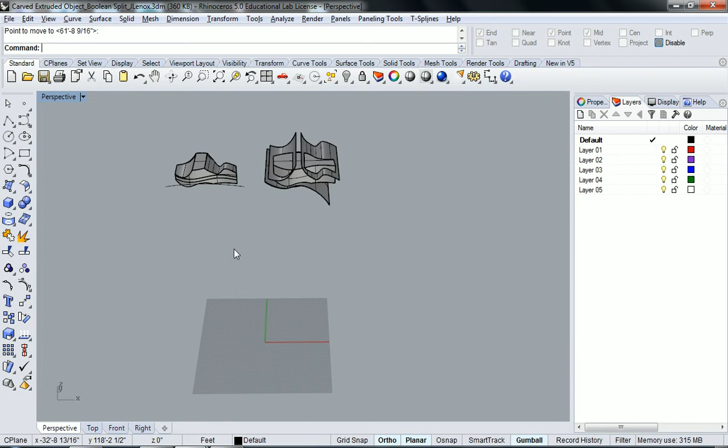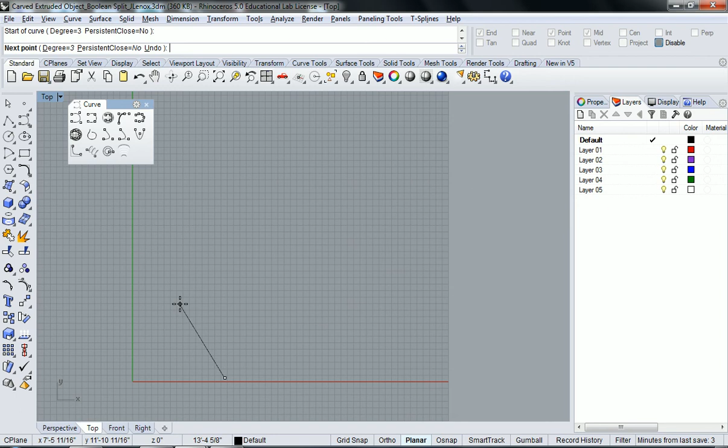So we're going to work on another shape similar to this one, using a similar process to achieve similar results. These are all just different methods for producing a carved shape. I'm going to use interpolated curves again, but instead I think I'll just use control point curves so I can get a nice smooth line. I'm going to turn my ortho off, my gumball off, and keep my object snaps disabled. I'm going to start to create an arced shape here.

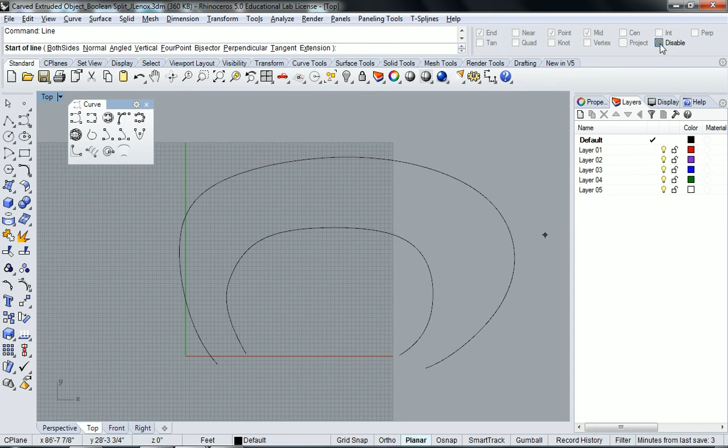And then I'm in top view, and I'm just going to go ahead and do another one here. I'm going to go through the same process again. I'll turn my object snaps on so I can have the endpoint selected, and go ahead and close this shape off. I'm going to join it together.

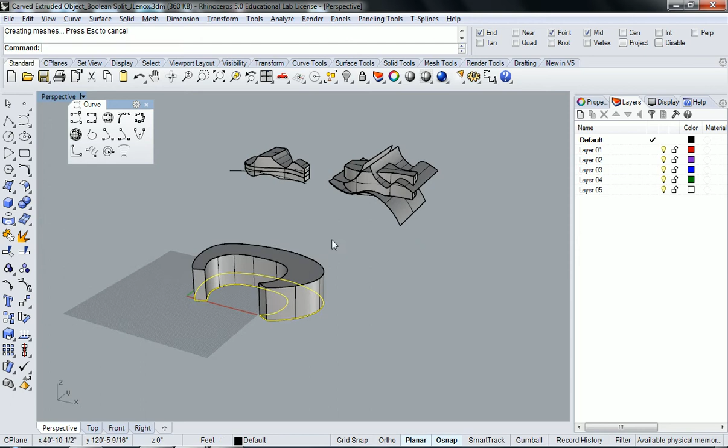Then I'm going to go into perspective, and I'm just going to extrude this curve. Let's do it a similar distance as we did before, I think I said 20 feet, and there it's created that for us.

I'm going to zoom to the selected object so that way I'm rotating just around it. So what we need to do now is figure out a new way to carve this, and the way we're actually going to do it is through a series of lines that we create that we can then loft together. What I'm actually looking to achieve here is more of a spiraling shape, a spiraling carving motion. Let's try and achieve that.

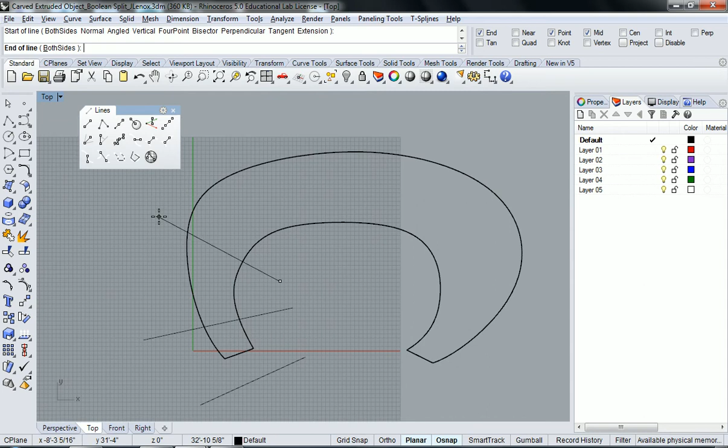The first thing I need to do is go into top view. I'm going to open up the lines area so you can see all the lines here, and I'm just going to use a regular old line. I'm going to start my first line sort of outside of the object, then hit spacebar to repeat the command, and do another one like right there, and another one right there, and one last one here. So I've got 4 lines, and they kind of sort of follow perpendicular to the curve I'm doing, just approximated.

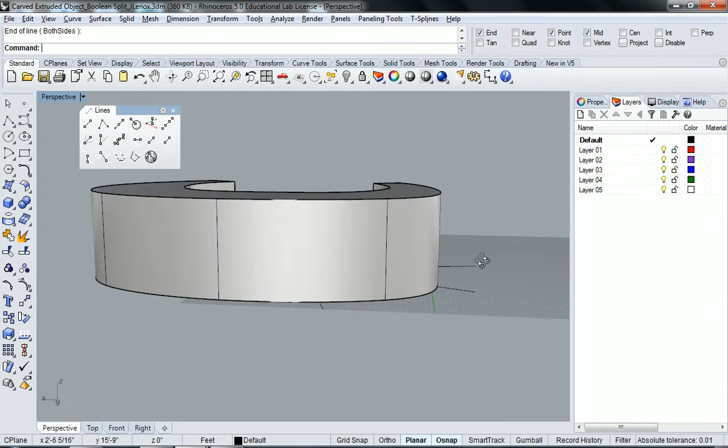Now that I have those drawn, I'm going to move these up incrementally so that way I can start to create a spiral. I need to move each one of these curves up a certain dimension, and since we made it 20 feet tall, since I have 1, 2, 3 here, I'm going to go 5, 10, 15.

The first one's going to be 0, and it's actually going to be this line right here. So I'm going to leave this one at 0, and move these 3 up. I'm going to turn on my gumball because it's an easy way to move, I don't have to type any commands, and I'm just going to click the blue arrow and type 5 for 5 feet, and you'll notice they all move. Then in order to deselect one line, I'm going to hold down Control and click the line I don't want anymore, and it'll deselect it.

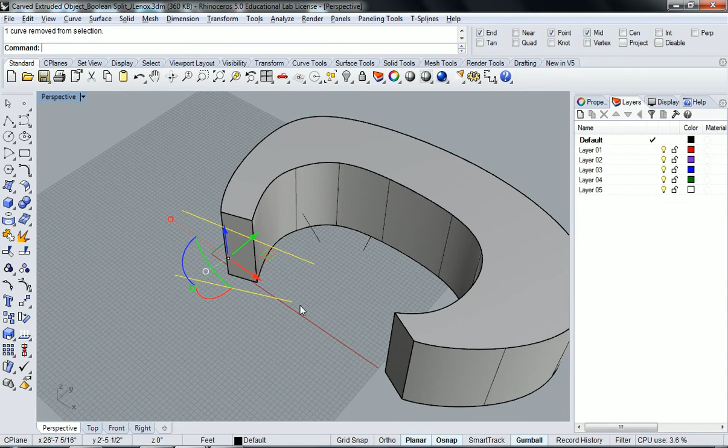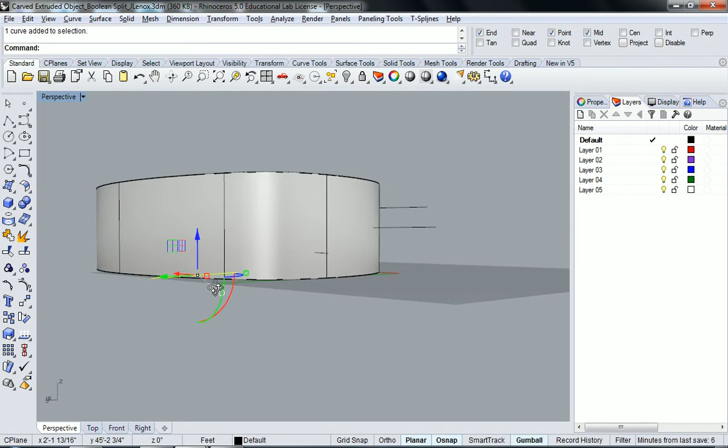Then I'm going to do the same process and incrementally move all these up 5 again. Then I'll deselect this last one, and move this last line up 5 again. So now you can see each one of those have moved up 5, with the first one being at the 0 plane.

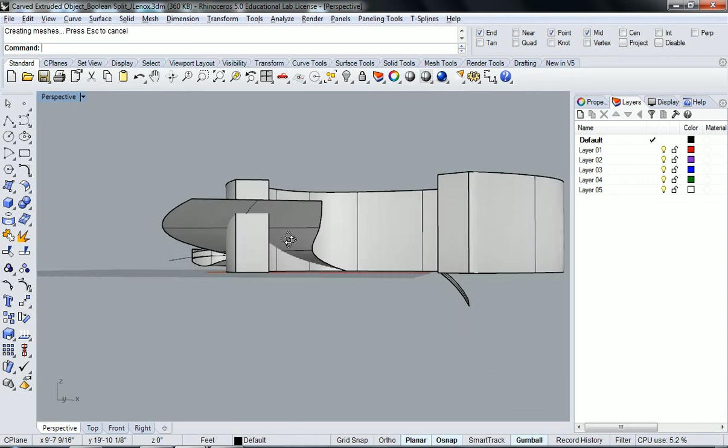So now what I can do is loft these together. I'm going to select all of them and hit loft. And I'm going to say OK because it looks good to me. So now I have that one taken care of.

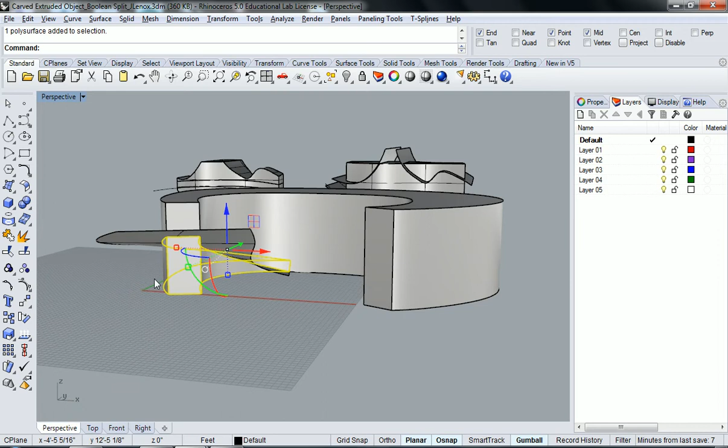So let's go ahead and split this out, right? Let's use the same command we did before, Boolean split. I'm going to select the object I want split, hit enter, then select the cutting object, and hit enter. Then if I hide this portion here and that surface, you can see now I've created a spiral.

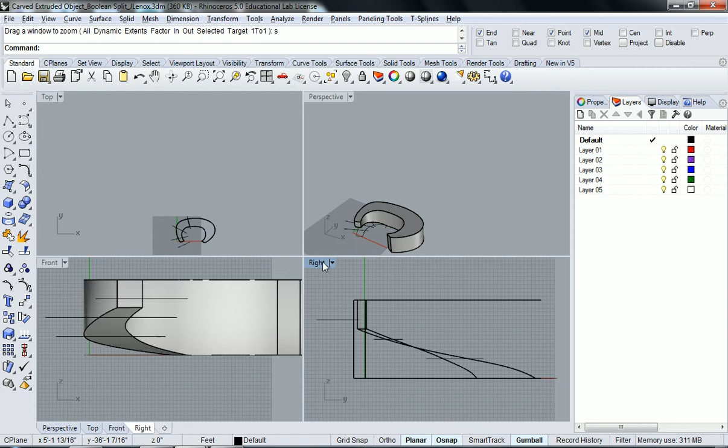If you go into your other views and hide all the information in the background so you just have that object, you can start to see the spiral there. I'm going to turn all my views into shaded so you can see it in all views.

So you can see in front view that using that series of lofted straight lines and moving them up incrementally will give me sort of a lifting motion that takes this object up off the ground. And it's also done in a spiral, so it's looking pretty interesting there.

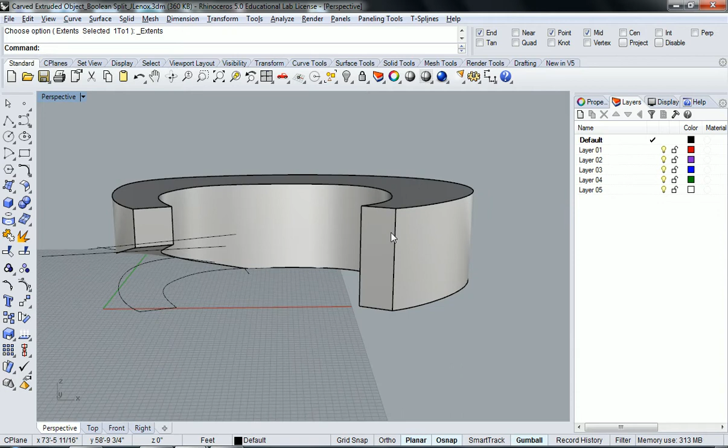I can accept that. So let's go ahead and do another one on this side. But this time, let's cut it going the other direction, right? So instead of from down to up, let's start from the top and work our way down. So what we need to do is the same exact process.

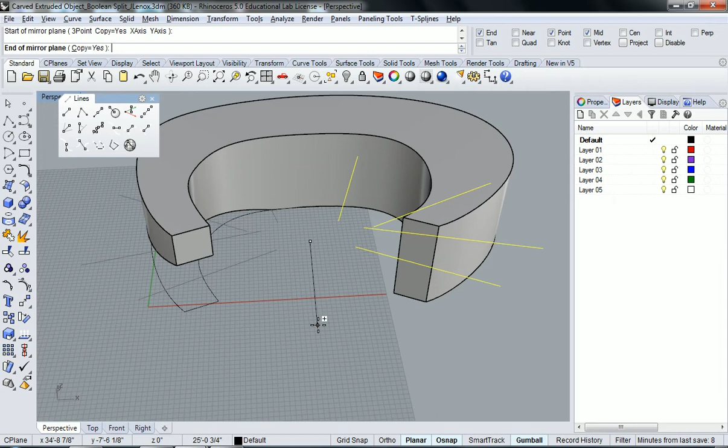I'm going to go to the lines here in the toolbar. I'm just going to select a line and mirror the selection, these lines here. I mean, you could, but the only problem with mirroring that is you don't have an axis to necessarily mirror off of, so you'd sort of just be doing it at random. And since I don't want the exact same result again,

I'm just going to go ahead and redraw new lines. You could do what I just did right now and mirror it like that, and then you could mirror it again.

Let's not worry about that, let's go ahead and just draw fresh lines. We'll have more control that way. So I'm going to draw a line out here.

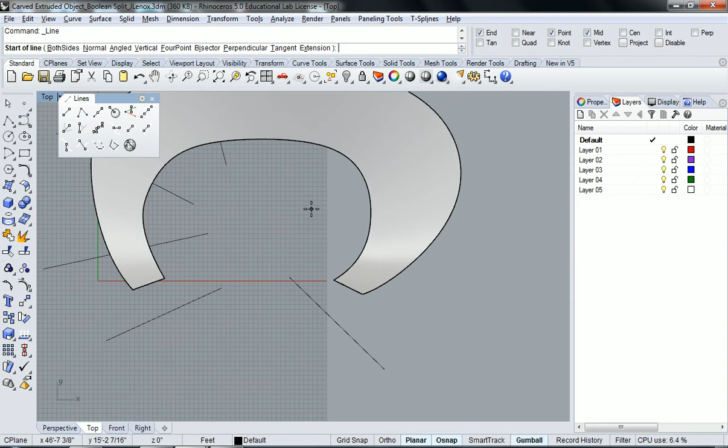I'm going to do the same process again. Draw another line there, another line there, and another line there. So now I've created 4 curves again.

Now that I have those created, I'm going to X out of my line toolbar. Let's say I was using lines and curves a lot, both of them, and I don't want to keep clicking to open them. What you can do is combine them together.

If you go ahead and select that, you can drag it in there, and now I'm creating my own customized toolbar. So maybe if I'm just using lines and curves, now I have this and it's really easy for me there.

And if you really use this a lot, you could dock it anywhere. So depending on if you're using something a lot, this will help speed up your process because they'll be readily available and right here.

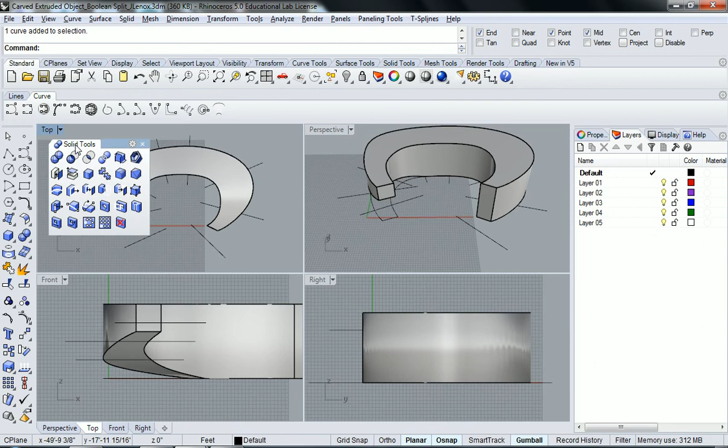So for instance, if we were using the Boolean stuff a lot too, I might want to bring that up there too and make that part of this as well. So now I'm using the solids, curves, and lines, and it's all right there for me, and it's just less time trying to remember where things are because you're creating your own custom toolbar.

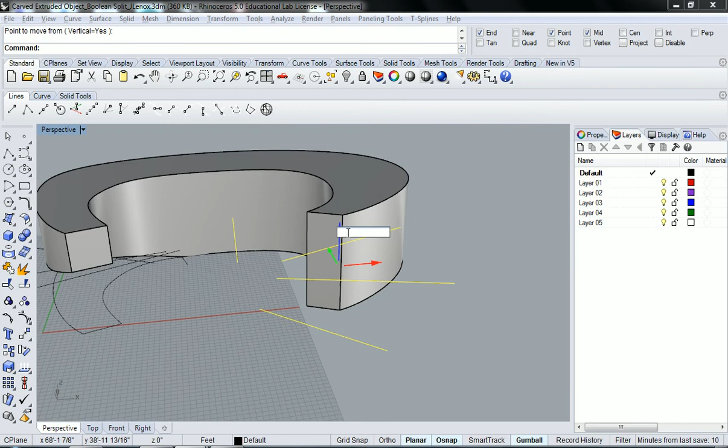So I'm going to go ahead and select all these lines that I just drew, and since our object is 20 tall, I'm going to go ahead and move them all up 20 so they're all at the same level. Then I'm going to deselect the one that's not on the plane.

Or you know what, that's the wrong one there. So I'm going to move them all up 20, and I'm going to deselect this one.

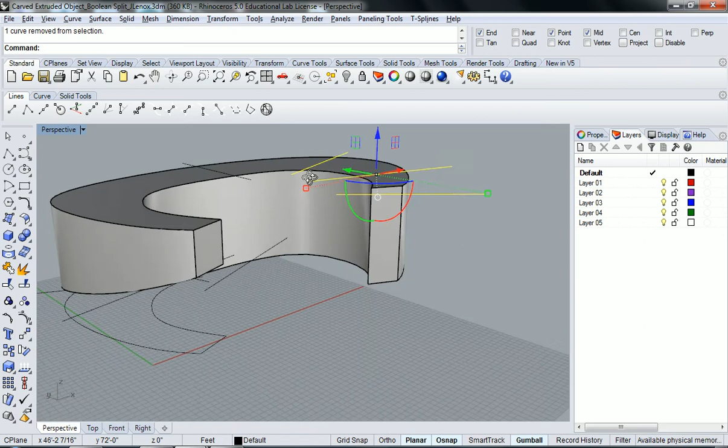And then I'm going to move them all down -5. So I'm going to go -5, deselect that line, then -5 again, deselect that line, and then -5.

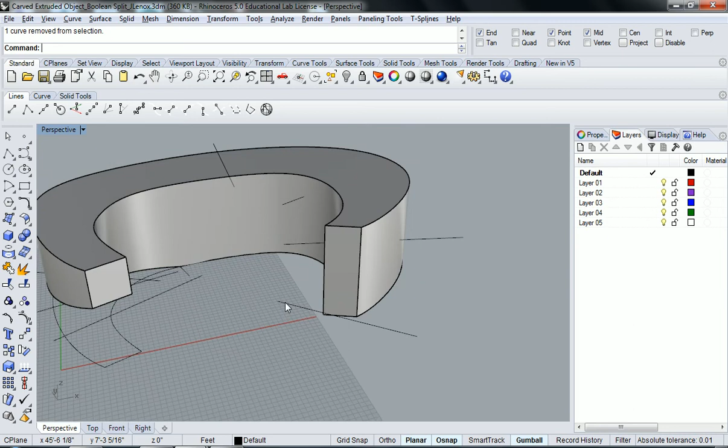So now I've created a spiral in the opposite direction. Instead of it spiraling up, this one's spiraling down. And now I'm going to loft those curves together.

So create another lofted surface, and let's go ahead and do the Boolean split. Now I've got my toolbars here, so I can go right to it.

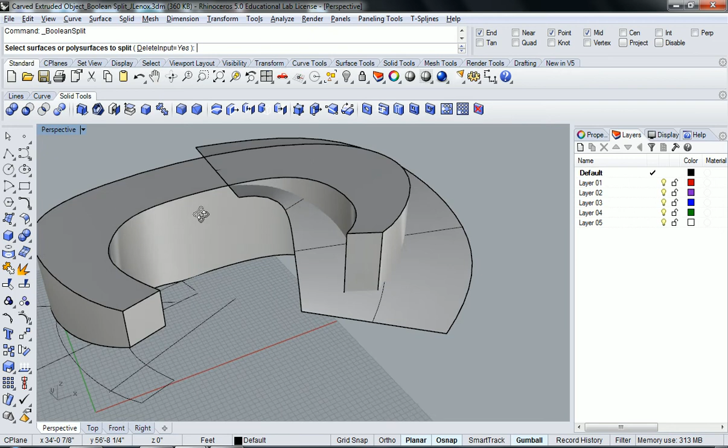Let's find out where it is - Boolean split. Select the object, hit enter. Select my cutting object, hit enter. And when I hide these 2 pieces of information that I used, now it shows my result. So you can see here I've used lofted curves now to carve out an object.

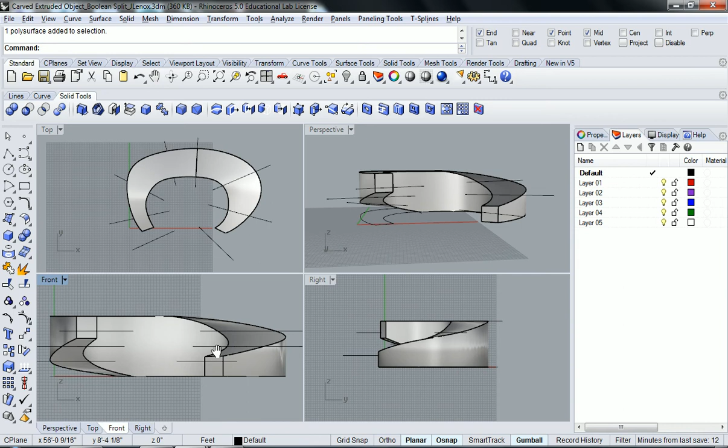There it is, so this is something that's super helpful. I typed in filter to find it, and it's actually called selection filter. When you click that, it'll bring up a dialog box here for you.

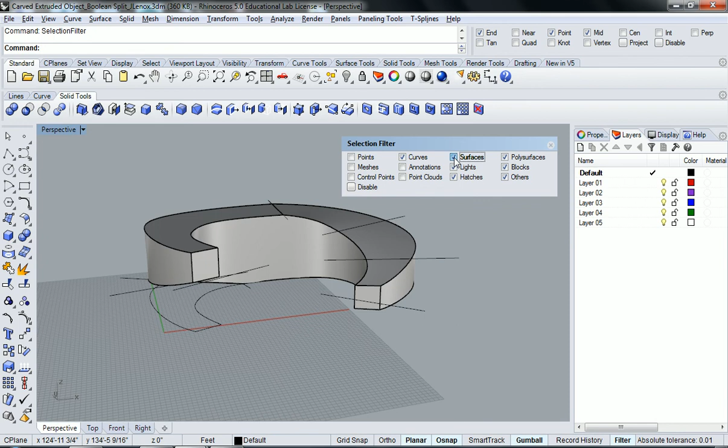And you'll notice that all this stuff is checked, and so what that means is it's going to select all these objects here. So let's say if I just turn on just curves checked.

Now when I highlight over this, it's only going to select curves because I have just the curve selected. If I were to just want to select just the poly surface, now when I highlight over this, it's only selecting the poly surface. So this is a good way if you have overlapping geometry like what I have here.

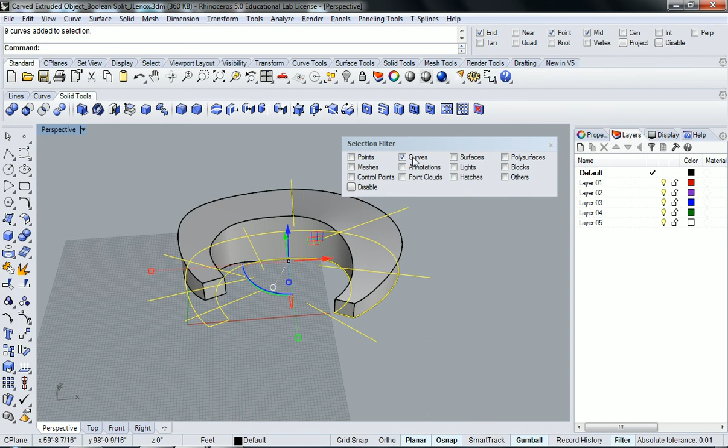I have lines and poly surfaces on top of each other, and let's say I want to move these curves out of the way but keep the poly surface there. I can just select the curves, and when I highlight over them, that's all that's going to be selected, and then I could move that information over, and my poly surface will remain.

Now just be careful if you do use this, because if you don't recheck these, you're not going to be able to select them, and you're going to be like, why can't I move any of this stuff? And you're going to freak out.

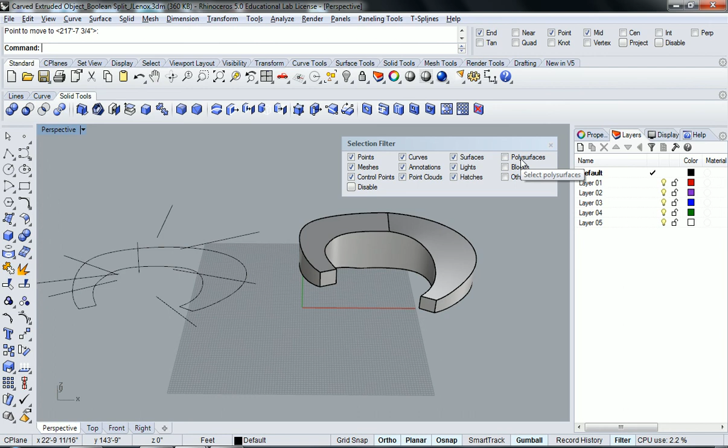So I'm going to just go ahead and flip all this back on. So it's all back on. I was just showing that as an example there.

And if you like this option too, you can also put this up in the toolbar and customize your own toolbar. For now, I'm just going to X out of it, and what it's called is selection filter. The best way to find it is to start typing the word filter, and it'll be your second option there - selection filter.